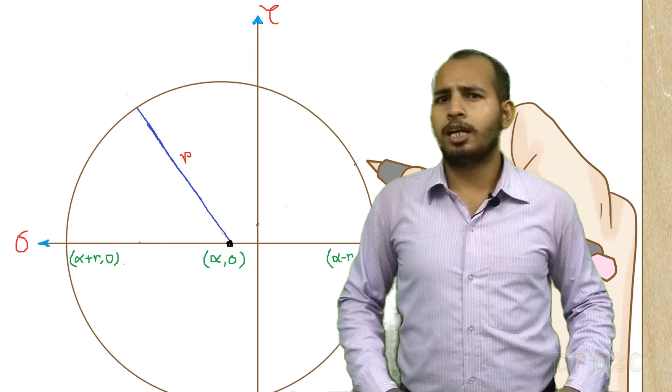तो आज बात करेंगे मोर सर्कल की थियोरी के ऊपर। सबसे पहला क्वेश्चन इस टॉपिक से - व्हाट इज द ऑब्जेक्ट ऑफ मोर सर्कल? ऑब्जेक्ट क्या है इस मोर सर्कल करने का?

पहला क्लास जितना भी किए थे आपने देखा होगा, जो लोड अप्लाई कर रहा था मेंबर के ऊपर, उसका जो डिफॉर्मेशन हो रहा था वो सिमेट्रिक हो रहा था। यहाँ पर अगर लोड अप्लाई करेंगे तो मेंबर अगर रोटेट कर जाए विदइन 360 डिग्री एंड ऑरिजिन फिक्स्ड रहेगा, तो उस केस में कैसे हम मैक्सिमम स्ट्रेस निकालेंगे, कैसे मिनिमम स्ट्रेस निकालेंगे, और कौन से एंगल में ये स्ट्रेस मैक्सिमम हो रहा है - ये सब कुछ निकालने के लिए मोर सर्कल का थ्योरी पढ़ना होगा।

At first, we have to know what is the object of this theory of Mohr circle. ये थियोरी ऑफ मोर सर्कल करके क्या होगा। पीछे के क्लास में मैंने बताया था, अगर ये एक स्ट्रक्चर है,

इसके ऊपर एक लोड अप्लाई किया है तो इस स्ट्रक्चर का डिफॉर्मेशन होगा, और वो डिफॉर्मेशन होगा सिमेट्रिकली, और इस डिफॉर्मेशन होने से इसके अंदर स्ट्रेन स्ट्रेस जनरेट होगा। Yeah, deformation of this body is symmetrical, not unsymmetrical, and deformation is like this। अगर इस बीम का क्रॉस सेक्शन देखा जाए,

लोड अप्लाई करने से पहले भी क्रॉस सेक्शन दिखने में ऐसा है, और बाद में भी ऑलमोस्ट क्रॉस सेक्शन ऐसा ही रहेगा। लेकिन आज हम बात करेंगे थियोरी ऑफ मोर सर्कल के बारे में।

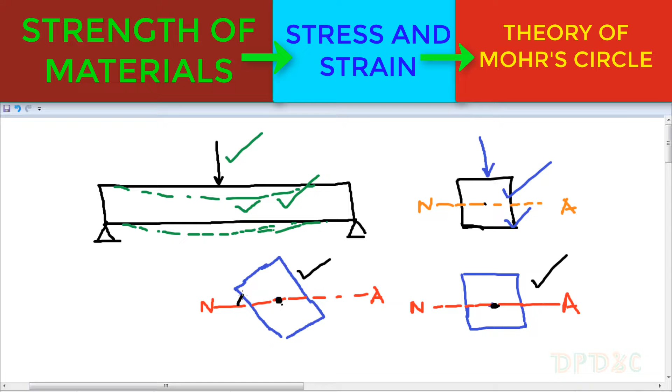ये लोड अप्लाई करने से पहले का क्रॉस सेक्शन है, और ये लोड अप्लाई करने के बाद जो क्रॉस सेक्शन हुआ है वो कंडीशन में दिखने में ऐसा लग रहा है। तो यहाँ पर चेंज क्या हुआ है, यहाँ पर दोनों बॉडी का ऑरिजिन सेम प्लेस में है, लेकिन इसका बॉडी रोटेट कर गया है। तो इसका एक्सिस रोटेट कर गया है।

दैट मीन्स अगर ये एक्स एक्सिस है एंड ये वाई एक्सिस है, ये लोड अप्लाई करने से पहले का है, एंड लोड अप्लाई करने के बाद जो एक्सिस बन गया है वो है ये, एंड दैट इज एक्स, एंड दैट इज वाई, दैट इज एक्स डैश, एंड दैट इज वाई डैश, एंड एंगल इज थीटा।

तो थियोरी ऑफ मोर सर्कल में हम सीखेंगे, अगर ये बॉडी लोड अप्लाई करने से रोटेट कर गया विदइन 360 डिग्री, तो उस केस में हम इसके बॉडी का जो स्ट्रेस कंपोनेंट है उसको कैसे निकालेंगे।

फिर से मैं बोल रहा हूँ, यह एक नॉर्मल कंडीशन का क्रॉस सेक्शन है। That means when deformation is symmetrical, for that case before loading and after loading cross section is almost same, but for this case that is before loading and that is after loading।

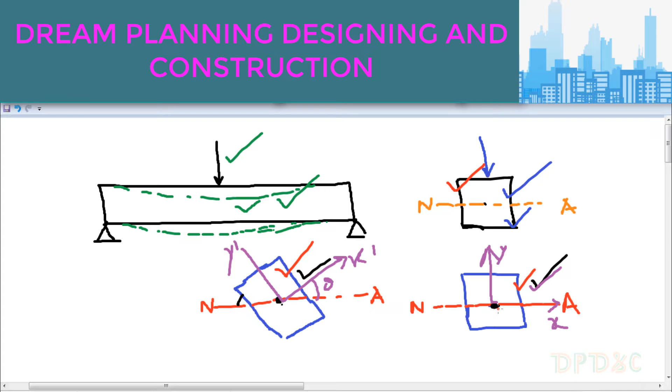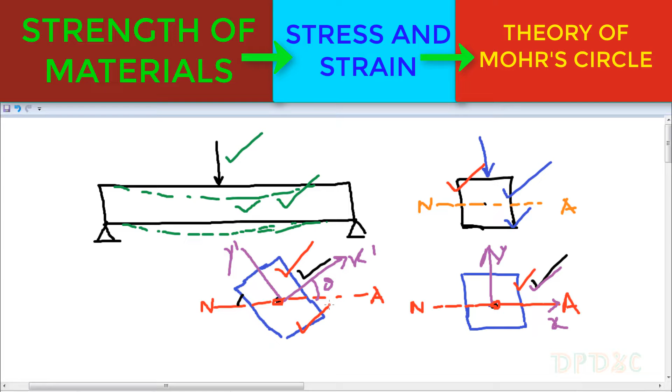इसमें चेंज क्या हुआ है, इसमें ऑरिजिन पॉइंट दोनों का फिक्स्ड है, बट एक्सिस रोटेट कर गया है। तो विदइन 360 डिग्री ये बॉडी कैसे भी रोटेट कर जाए, हम थियोरी ऑफ मोर सर्कल अप्लाई करके इसका जो स्ट्रेस कंपोनेंट है उसे हम इजीली निकाल सकते हैं।

Here this structure is a symmetrical structure, and from this structure we can easily say that from which plane maximum normal stress will generate.

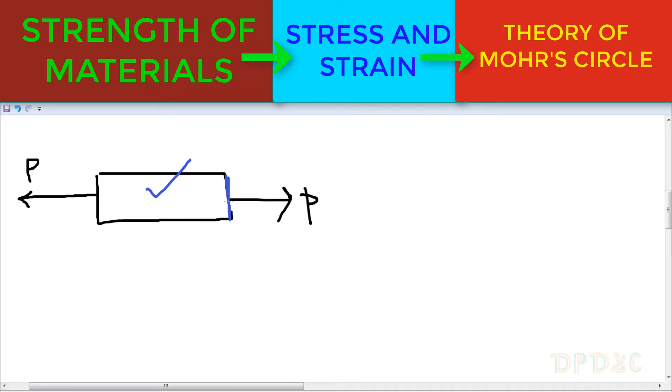Here maximum normal stress generates from this plane, because that force is perpendicular with this plane and both forces are same. But if this structure deforms unsymmetrically with unsymmetrical load, then क्या होगा,

कौन से प्लेन में मैक्सिमम स्ट्रेस जनरेट होगा, कौन से प्लेन में मैक्सिमम नॉर्मल स्ट्रेस जनरेट होगा, ये कैलकुलेट करना है। तो कैसे कैलकुलेट करेंगे, ये भी हम थियोरी ऑफ मोर सर्कल से कैलकुलेट कर सकते हैं। At first we calculate normal stress and shear stress of the body after rotation।

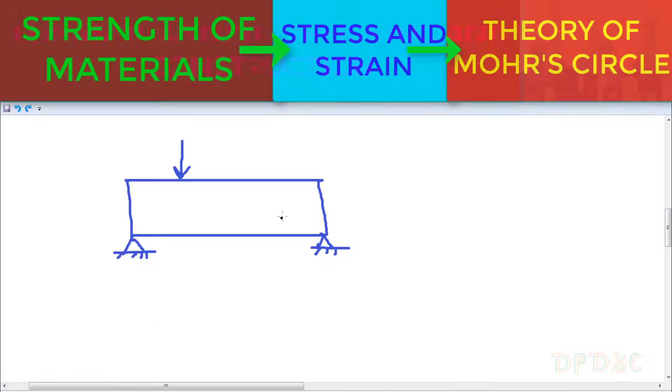ध्यान से देखिएगा, जी हाँ आपको ही बोल रहा हूँ, ध्यान से देखिएगा। That is unsymmetrically loaded structure, and from this structure we consider a small element। We just cut this element and draw here।

If we cut this element, the stress components are like this. On the z plane, sigma z is the normal stress, tau zy is the shear stress in z plane y direction, and tau zx is the shear stress in z plane x direction. On the x plane, sigma x is the normal stress, tau xy is the shear stress on x plane y direction, and tau xz is the shear stress on x plane z direction. On the y plane, sigma y is the normal stress, tau yx is the shear stress on y plane x direction, and tau yz is the shear stress on y plane z direction. That is the general state of stress condition.

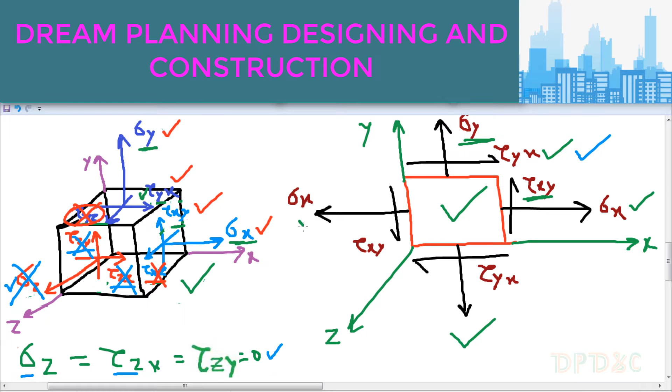So from this figure we just put the stress components on this 2D plane. Sigma x is in the x direction, and here also we put sigma x in the x direction. Here tau xy is in the y direction, so I also put tau xy in the y direction, and sigma y is in the y direction, so here I put that also in the y direction, and tau yx is in the x direction, so here I put that also in the x direction. We symmetrically provide both stress components on two sides. So the 2D plane stress figure is like this.

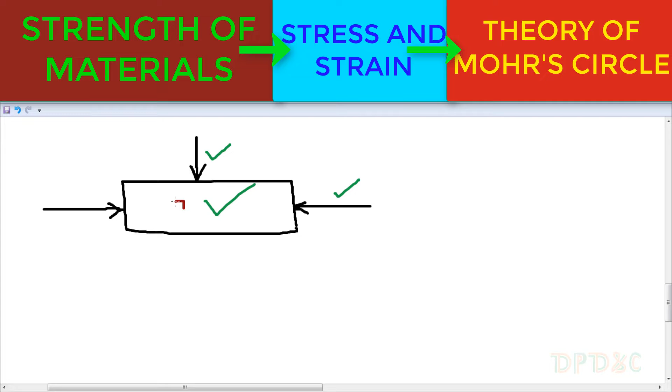Suppose that is a member and we apply transverse load and axial load on this member. If we consider a small element from this member, then that is like this. We denote that as x direction and that as y direction. So that is sigma x, that is also sigma x, that is sigma y, that is also sigma y, and that is tau yx, and that is tau xy, that is also tau xy, and that is tau yx. We consider all these stress components as positive.

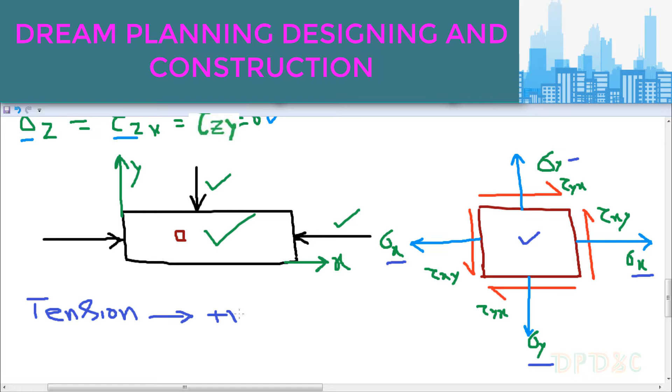That means for tension, the direction is outward, so both sigma x and both sigma y are positive. If this direction is inward, then that is negative. For compression, that is the inward direction, so that is negative. And here all shear stress components are positive. Here the two stresses tau xy and tau yx are both called complementary shear stress.

Here we denote that as dx and that as dy. So both tau yx generate a couple, that is tau yx into dy, and similarly both tau xy generate a couple, that is tau xy into dx, and that is like this.

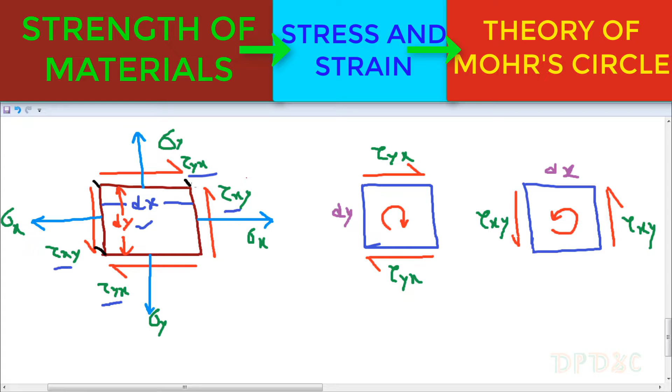We consider unit thickness of this element, so that is 1. Here tau yx is a stress, shear stress, and we know that shear stress into area equals force. So in this face the force generated is F1, and in this face also the force generated is F1, because both values are same. So F1 equals to stress into area.

The stress is tau yx, and the area is dx into unit thickness, that is 1. So that is the value of F1.

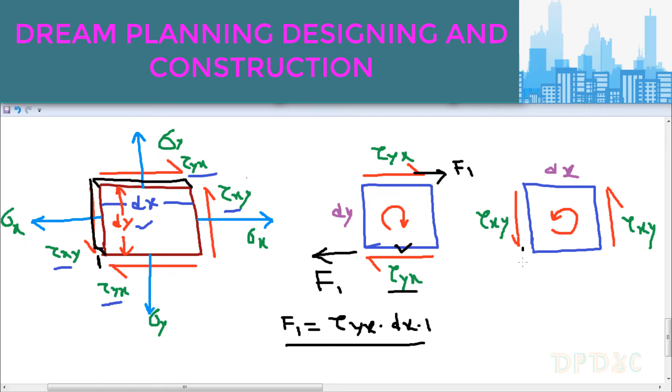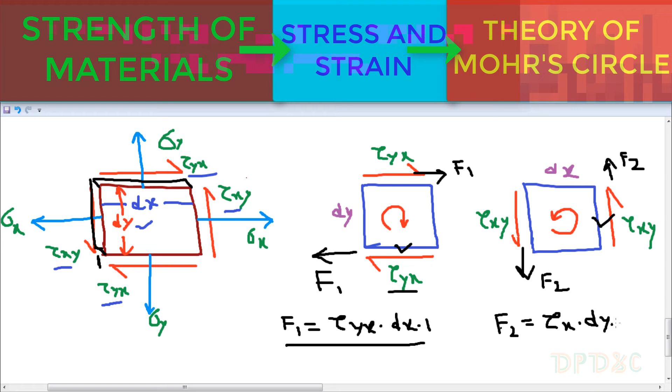Similarly, in this face also force is generated, and we denote that as F2. So F2 equals to tau xy into this face thickness (that is 1) into distance dy. So dy into 1 is the area. That is the value of F2.

Suppose we denote this couple by M1 and this couple by M2. So M1 equals to F1 into perpendicular distance dy, so F1 into dy, which equals tau yx into dx into dy. And M2 equals to F2 into dx, which equals tau xy into dy into dx.

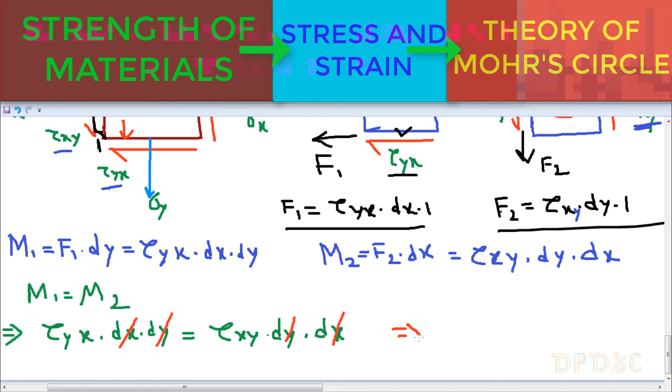So we write M1 equals to M2, and here dx and dy will cancel out because both sides have dx and dy present. So from here we can write that tau yx equals to tau xy. So on both sides the shear stress generated is equal, meaning both complementary stresses are equal.

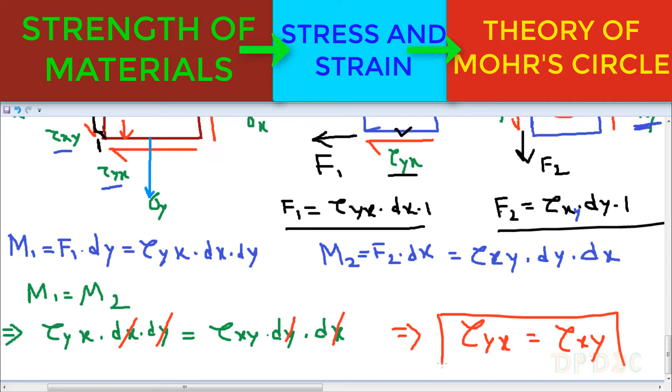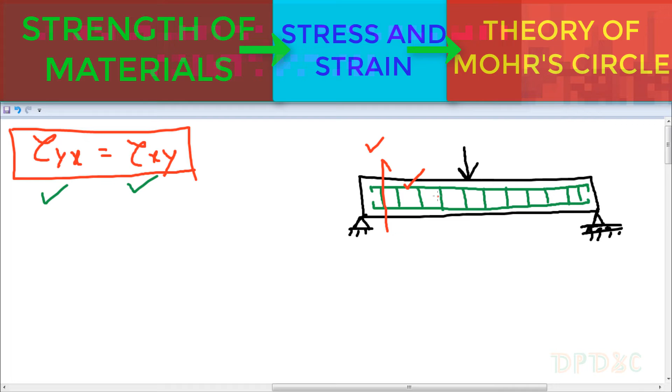Now we calculate stress when the body is rotated but the origin is fixed.

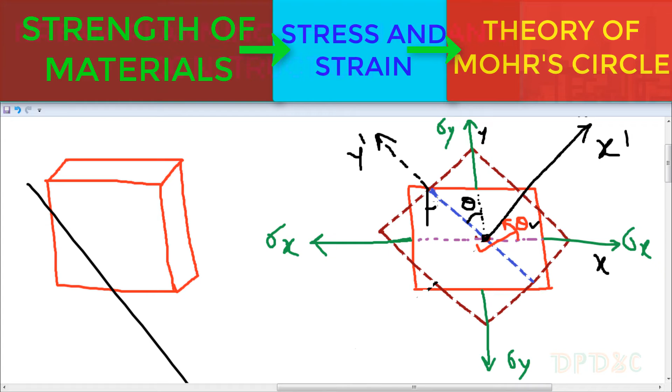From this element we can say that this element has rotated by angle theta with respect to the origin. From this figure we just cut a section here, that is theta, and similarly that is also theta, so we can write that is theta. So that is the figure before rotation, and after rotation of this figure the rotation angle is theta.

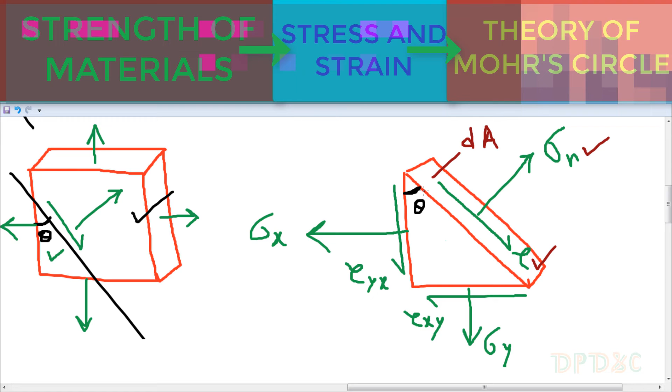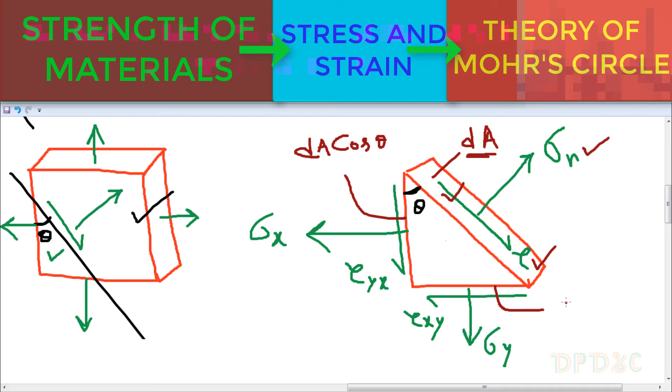We consider this plane area as dA. So this plane area is dA cos theta, and this plane area is dA sin theta. Now from this figure we draw a line diagram.

So here I draw a line diagram of the force of this element, and the rotation angle theta is that, so that is also theta, and that is also theta. After rotation, the new coordinates are x dash and y dash, which I denoted earlier.

So we need all forces according to this line and this line, so we just break all this force onto these two lines. So here tau yx is the shear stress on this plane, so total force is tau yx shear stress into area, that is dA cos theta.

So we just break this force into two components, that is the cos component and the sin component. So we denote this force by F1. The cos component is F1 cos theta and the sin component is F1 sin theta.

Now we break this normal force into two components, because that is the normal stress, and area is dA sin theta. We break this force into two components, cos component and sine component. We denote this force by F2, so F2 cos theta and F2 sin theta.

Now we have to break this force also, that is stress along x direction, sigma x, and area is dA cos theta, that is this plane area. So we break this component into two parts, cos component and sine component.

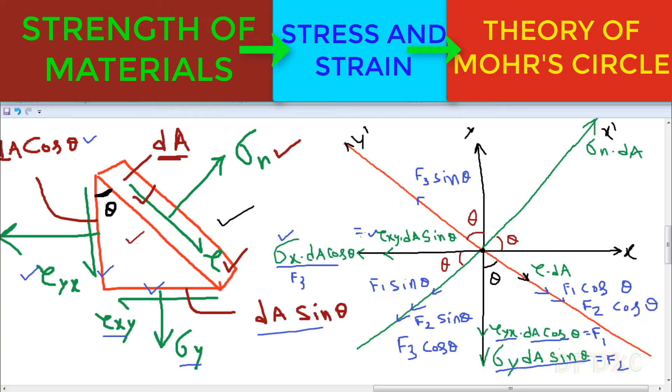So we break this force into two parts, sine and cos. We denote this force by F4, cos component is F4 cos theta and sine component is F4 sin theta. Now on this figure we apply two conditions.

Condition 1 is summation of F x dash equals to 0, and condition 2 is summation of F y dash equals to 0. So from condition 1 we can write that.

Now we put the value of F1, F2, F3 and F4. F1 equals to tau yx dA cos theta, F2 equals to this, F3 equals to this, and F4 equals to this. So from this equation we can write that.

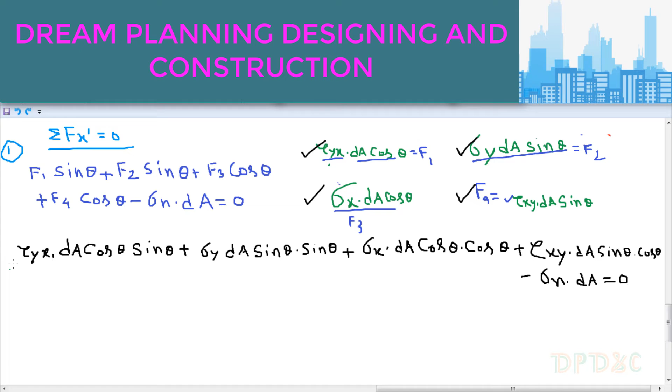Now we can write that sigma n equals to sigma x into 1 plus cos 2 theta by 2, plus sigma y into 1 minus cos 2 theta by 2, plus tau xy sin 2 theta, because we know that 2 sin a cos a equals to sin 2a.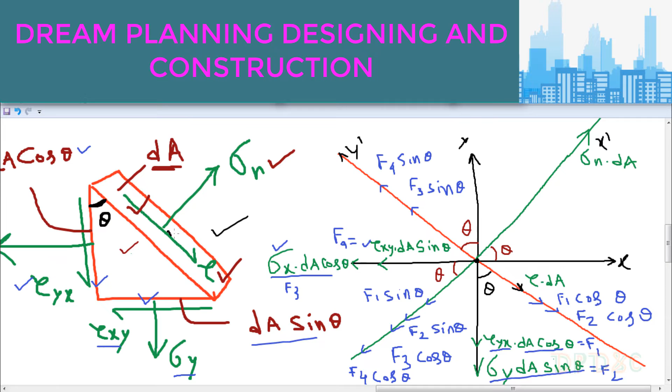So from this equation we can write that sigma n equals to this equation. That is the final equation of normal stress on inclined plane, that is the value of normal stress on this plane. So that is equation 1. We just arrange this equation in this format. Now we apply the second condition, summation of F y dash equals to 0.

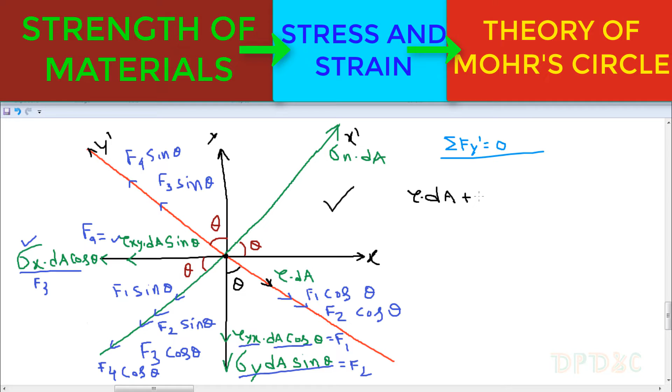From this diagram we can write that tau into dA plus F1 cos theta plus F2 cos theta minus F3 sin theta minus F4 sin theta equals to 0. Now we just put the value of F1, F2, F3 and F4.

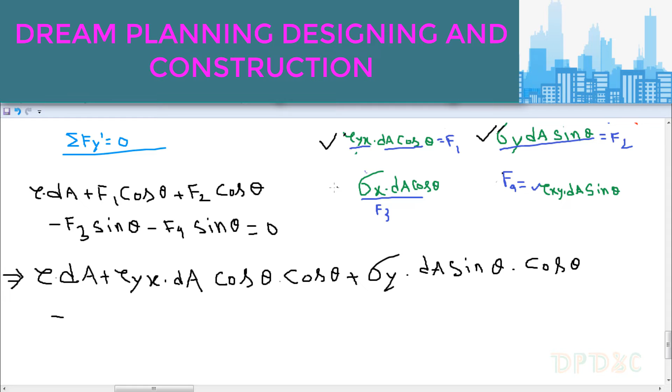That equals to tau into dA plus F1 cos theta, where F1 is tau yx into dA cos theta into cos theta, plus F2 cos theta, where F2 is sigma y dot dA sin theta into cos theta, minus F3 sin theta, where F3 value is sigma x into dA cos theta into sin theta, minus F4 sin theta, where F4 value is tau xy into dA into sin theta into sin theta, that equals to 0.

So from that equation we can write that tau equals to sigma x minus sigma y by 2 into 2 sin theta cos theta, minus tau xy into cos square theta minus sin square theta. That equals to sigma x minus sigma y by 2 into sin 2 theta, because 2 sin a cos a equals to sin 2a, minus tau xy cos 2 theta, because we can replace this by cos 2 theta.

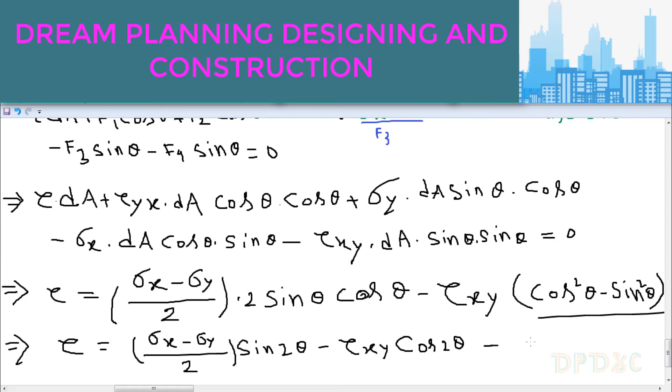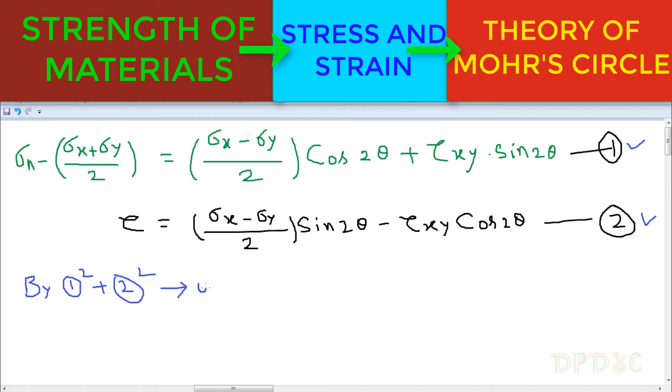So that is equation 2. Now from equation 1 and equation 2 we can write that by equation 1 square plus equation 2 square we get, so we get this equation by arranging these two equations.

We know that the general equation of a circle is x minus alpha whole square plus y minus beta whole square equals to r square, where the coordinate of the center of the circle is alpha comma beta and the radius of the circle is r.

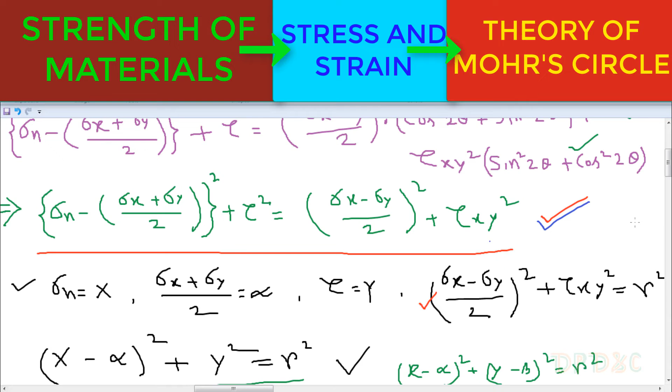If we plot this equation, then that is like this. So here we draw a circle and denote the axis sigma and tau. Now we have to plot the origin of this circle, that is alpha and 0, meaning the length is alpha and tau coordinate length is 0. That's why this point lies on this line.

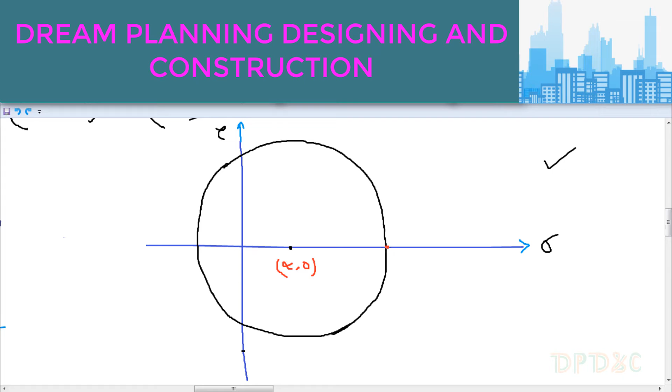What is the coordinate of this point? We know that radius of this circle is r, so this point's coordinate is alpha plus r and 0, and similarly this point's coordinate is alpha minus r and 0. Here that is the axis of principal stress and that is the axis of shear stress. Here is the origin point, maximum principal stress point is that, and minimum principal stress point is that.

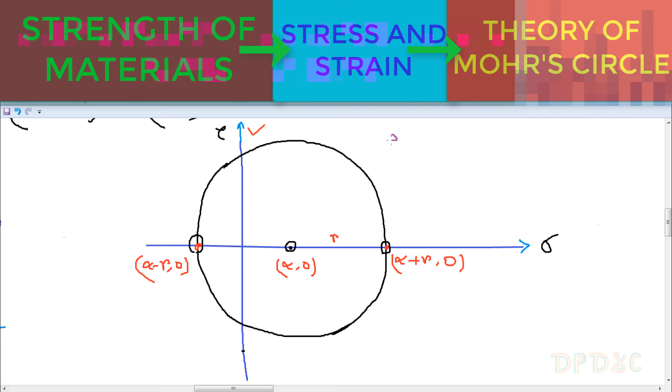Here we denote maximum principal stress by sigma 1, equals to alpha plus r. What is the value of alpha? Value of alpha is sigma x plus sigma y by 2. So sigma x plus sigma y by 2 plus r. What is the value of r? That is root over of sigma x minus sigma y by 2 whole square plus tau xy square.

So we get major principal stress value. What is the value of minor principal stress? Here we denote this minor principal stress by sigma 2, and similarly sigma 2 equals to alpha minus r. So alpha equals to sigma x plus sigma y by 2, minus r, and r equals to root over of sigma x minus sigma y by 2 the whole square plus tau xy square. So we get major and minor principal stress value.

What is the value of maximum shear stress? Here that is the coordinate of tau, meaning shear stress coordinate. So maximum shear stress value is that, and that is the radius of this circle. So radius of this circle is the maximum shear stress of this condition. You can write that tau max, meaning maximum shear stress, equals to root over of sigma x minus sigma y by 2 whole square plus tau xy square. So you get major principal stress, minor principal stress and maximum shear stress, and that circle is called Mohr circle.

Equation of this Mohr circle is that. So from this circle we can calculate, after rotation of body within 360 degrees with fixed origin point, major principal stress, minor principal stress and maximum shear stress also, meaning the stress components of this body.

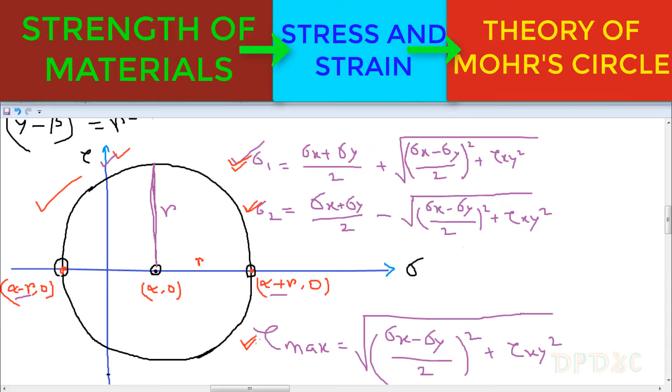Now we calculate for which value of theta stress is maximum, meaning normal stress is maximum, and for which value of theta shear stress is maximum. So that is the equation of normal stress. From this equation we calculate for which value of theta stress is maximum.

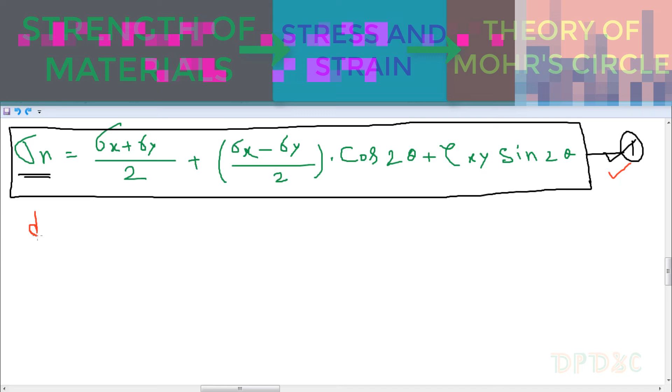So we derivative this normal stress with respect to theta. So d sigma n by d theta equals to, this term cancels out, and derivative of cos is minus sine, that equals to minus of sigma x minus sigma y by 2 into 2 sine 2 theta plus derivative of sine is cos, so 2 tau xy cos 2 theta.

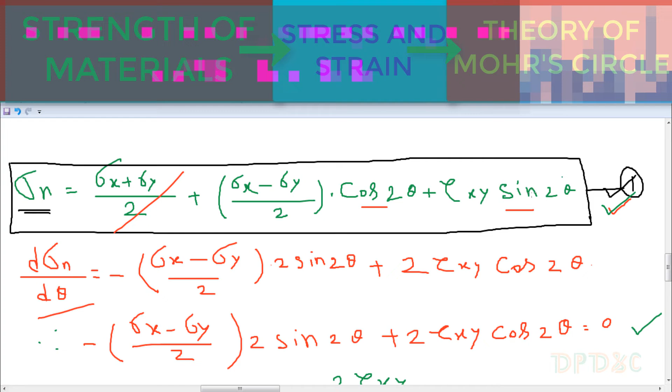So for maximization of this normal stress we put this derivative equal to 0. From that equation we get tan 2 theta equals to 2 tau xy by sigma x minus sigma y. This equation is for finding principal stress, that's why we denote this theta by theta p. So that is the main equation.

From that equation we find the value of theta p. From the general solution of tan theta we get 2 theta p equals to n pi plus phi, and theta p equals to n pi by 2 plus phi by 2, where n equals to 0, 1, 2.

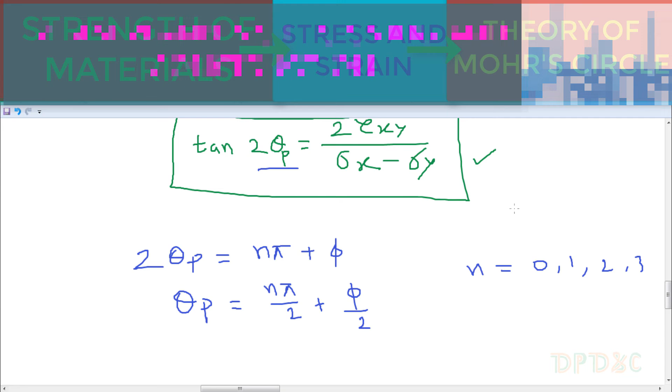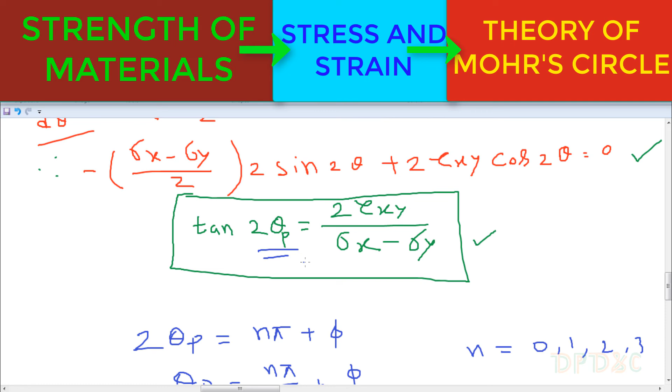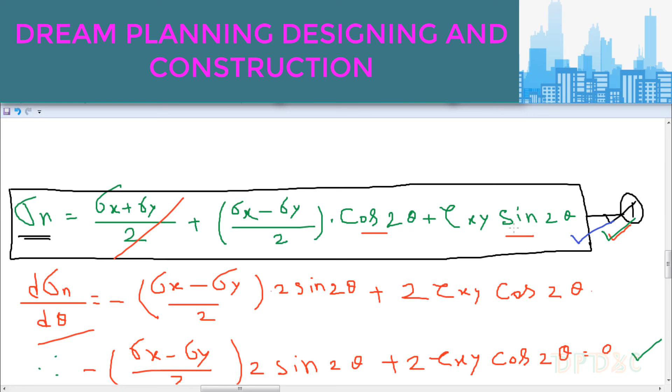So for which theta p value this normal stress value is maximum, that is maximum normal stress, and for which theta p value this normal stress is minimum, that is minimum normal stress. So we calculate maximum and minimum value of normal stress. So we understand the theory of maximization of normal stress.

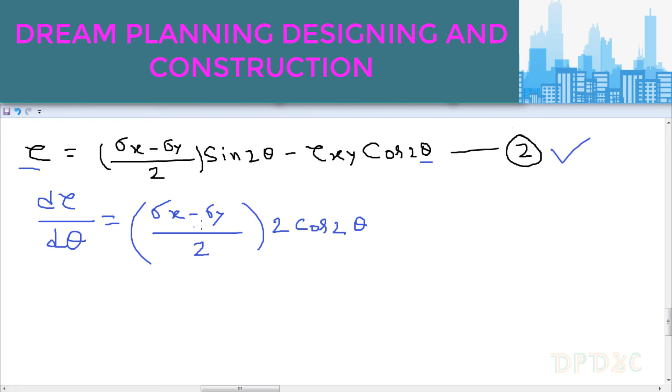Now for maximization of this shear stress we just take derivative of shear stress with respect to theta. So d tau by d theta equals to sigma x minus sigma y by 2 into 2 cos 2 theta, because derivative of sin is cos, minus derivative of cos is minus sin, so that is plus, that is 2 tau xy sin 2 theta, and from that equation we get tan 2 theta equals to minus of sigma x minus sigma y divided by 2 tau xy.

Here we calculate for which value of theta the shear stress is maximum. So here we calculate shear stress, that's why we denote this theta by theta s. From this equation we calculate theta s, and from this equation we can write that tan 2 theta s equals to minus 1 by tan 2 theta p.

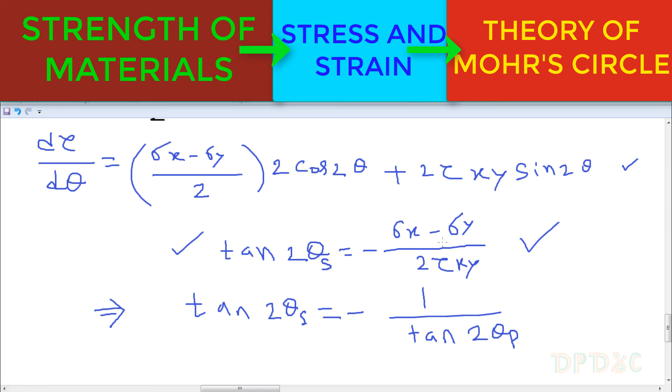Because tan 2 theta p equals to 2 tau xy by sigma x minus sigma y, that's why that is this. And from this equation we can write that 2 theta p minus 2 theta s equals to pi by 2, and theta p minus theta s equals to pi by 4.

I think there is a question, how can I write that? I'll give the solution for this. Just assume a minus b equals to pi by 2.

We take tan of both sides, so the formula of tan(a minus b) is tan a minus tan b divided by 1 plus tan a tan b, and that equals to, we know that the value of tan pi by 2 is infinite, so we can write that as 1 by 0.0000001, so that is almost 0. If we divide 1 by this type of number, then that is almost infinite.

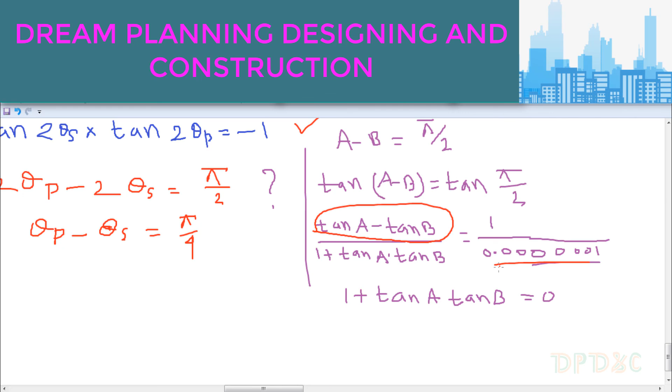So from this equation we can write that 1 plus tan a tan b equals to 0, because if we multiply this term with this term, its value tends to 0, that's why we put this 0. So from this we can write that tan a tan b equals to minus 1. So that equation is similar to this equation, and that's why we write this 2 theta p minus 2 theta s equals to pi by 2.

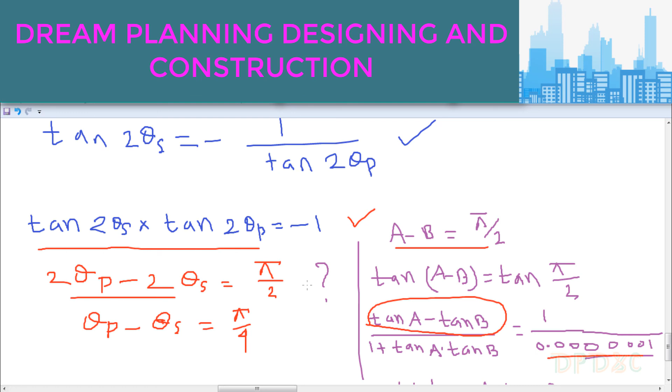So today we complete the theory of Mohr's circle. Next day I will discuss about problems of theory of Mohr's circle.